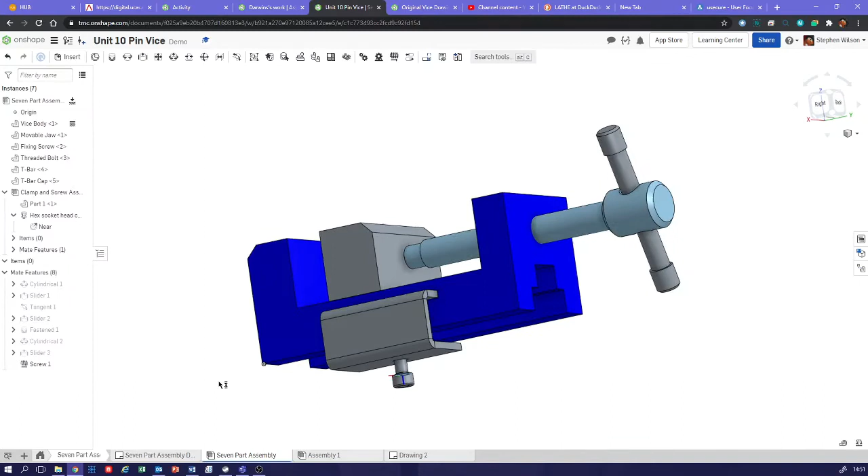So the first thing I don't think I've mentioned previously: we want a little screw to go in that hole there, and we can get that by going to Insert, Standard Content, and then selecting ISO, for international standard bolts and screws. Hex head bolt, or you could do set screws, hex socket - quite nice, quite like those. No, we don't want a set screw though. Slotted head screws, socket head screws - there we go, a nice socket head cap screw. Yeah, you can use an Allen key for that.

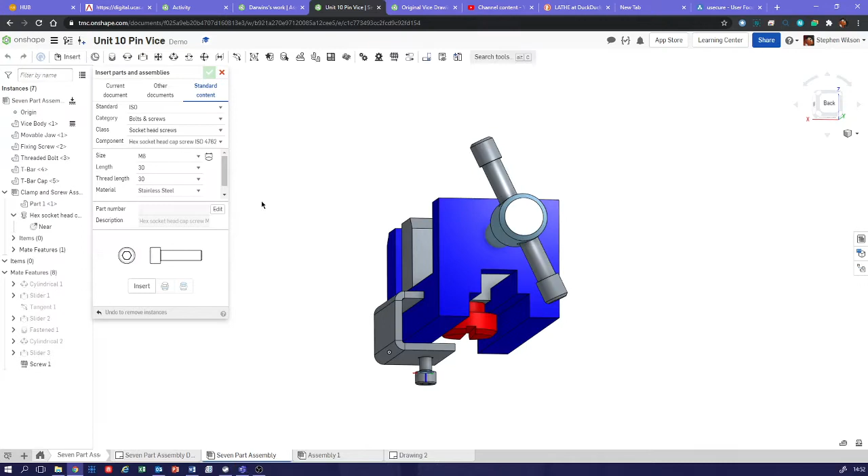And then we look at the size of the hole. We could go back to the drawing and check the size of that hole - I think it's 5mm, so we choose an M5 bolt to go in there. Just wait for it to think about that. Okay, and then we can choose the length - say 20mm is probably fine. Then we just press the insert button, and it will appear as if by magic. There we go, we can see that there, and then we can make that up into there in the usual way. Okay, so that's exciting.

Make sure you press the tick button when you've finished, unlike me who just pressed the cross button. Just to remind you, these icons here actually give you some insight as to how the things will interact with each other.

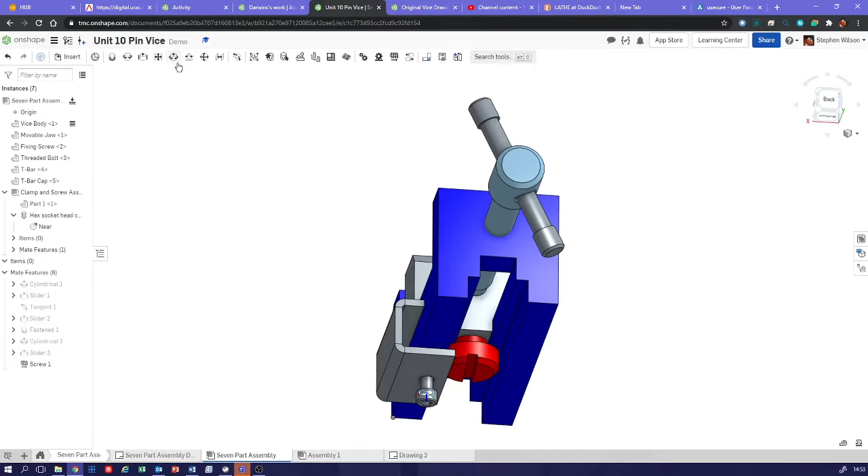So if you've got a screw thread, you want it to move backwards and forwards, but you also want it to rotate - so that's a cylindrical mate. If you don't want something to move, that's a fastened mate. So just think about how the parts interact with each other, and look at the icons and think: does that have the arrows in the direction that I need this thing to move?

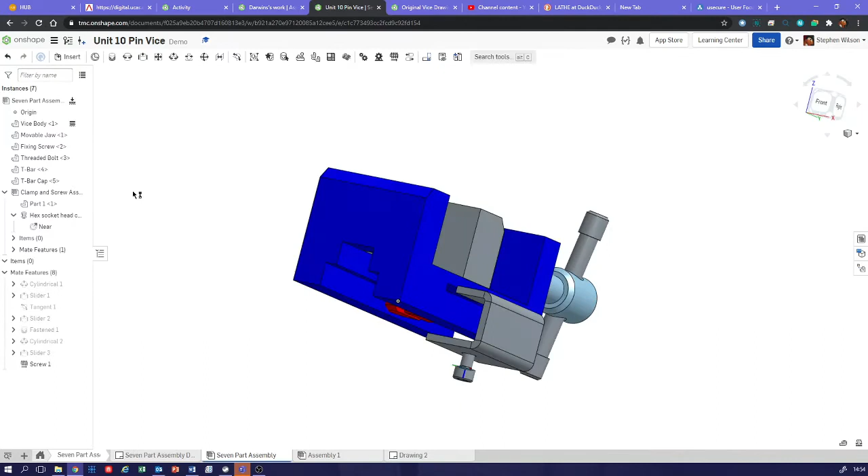When you're doing this, make sure that it slides in and out - you might have forgotten how to do that. Remember when you inserted this, I think I gave you tips on the video. Yeah, we picked an edge, didn't we? We picked an edge, so you've got what wants to be a slider mate there.

Yeah, as you can see, I'll just do it from scratch. When we move onto a surface, the blue arrow, the blue line there, is the Z-axis, and that's the direction we're going to slide in. So we don't want it sliding on a surface, do we? But if we put it on an edge, then the blue line's going in the right direction.

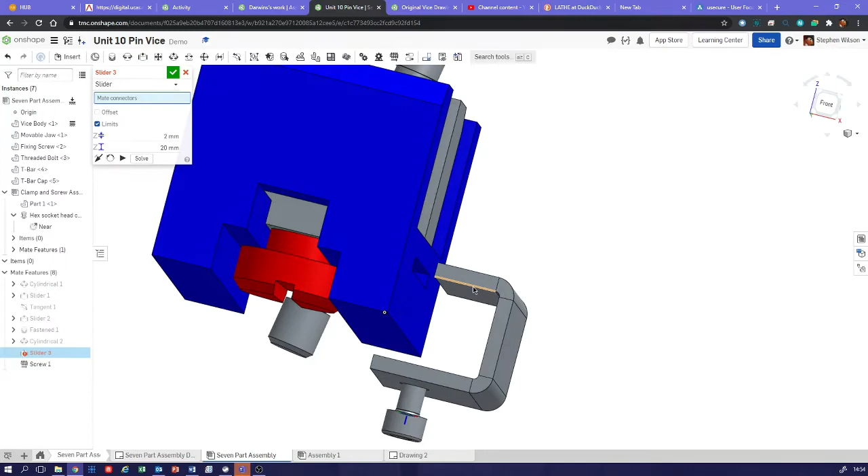Okay, so let's just pick the corresponding edges there - I'm going to pick the center points. And there we go, so we can slide that in and out now. Yeah, okay, so that's worth remembering.

The other thing, just to finish this off - you'll notice that as I move this backwards and forwards, it spins nicely. So I'll just get rid of that, and get rid of that. Of course, in reality, this part here and this part here aren't actually connected, are they? What happens is when we turn this, it moves forwards and pushes - doesn't actually sink through it, but would push this closed. But then when we move this back, it would leave it where it is.

But just to make things a little bit nicer to work within the model, we can attach these two things together, even though we know that's not the case in reality. We've got two flat surfaces - well, one flat surface and one curved surface here. So what we can do is use a tangent mate there, so we can attach it, and it just works a little bit differently to the others.

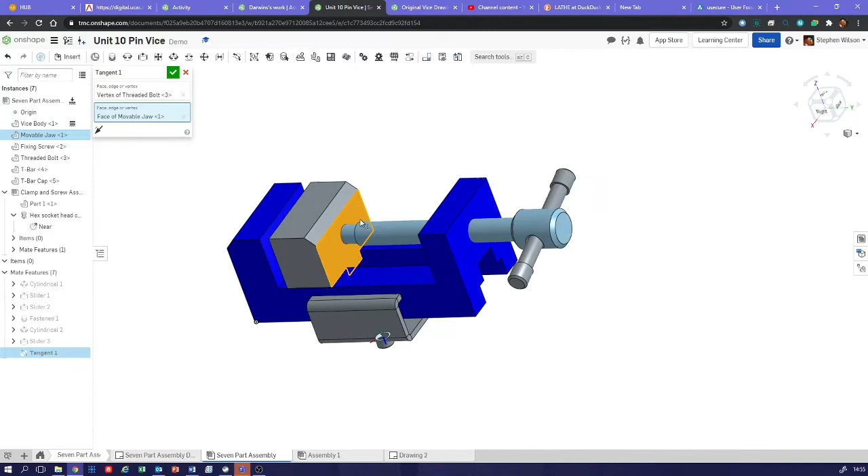Everything else, we just click our two points and it stacks them both in the same box. Here we've got two different boxes, so we just have to make sure we're in that second box when we pick our second face. Now these two things are glued together, even though in reality they're not actually glued together. It's been a bit laggy, isn't it?

Why would we do that? Well, we've got some relations we can set up: gear relations, rack and pinion relations, screw relations. So let's set up a screw relation. If we hover over it, it says: screw relation - select one cylindrical mate, select the screw relation tool, specify ratio.

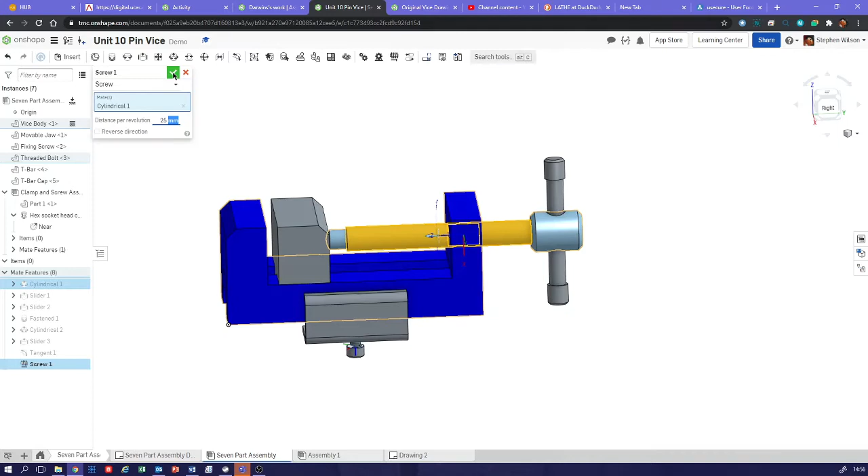What mate are we going to use? We're going to use that cylindrical mate - that's where we want our screw relation. If you want, you can set that to the pitch, the distance per revolution - work out what the pitch is per revolution, or the distance per revolution for the pitch of the thing, if you want to be particular.

But let's be fair, all we want is something that moves. Come on, you can do this. No, we can't. Oh dear, it is running very slowly. What I'd like to be able to show you is that as I slide this gently backwards and forwards, the other thing spins around, but it seems to be not wanting to do that at the moment. I'm not entirely sure why, but you saw that happening at the start, didn't you, before we did it again.

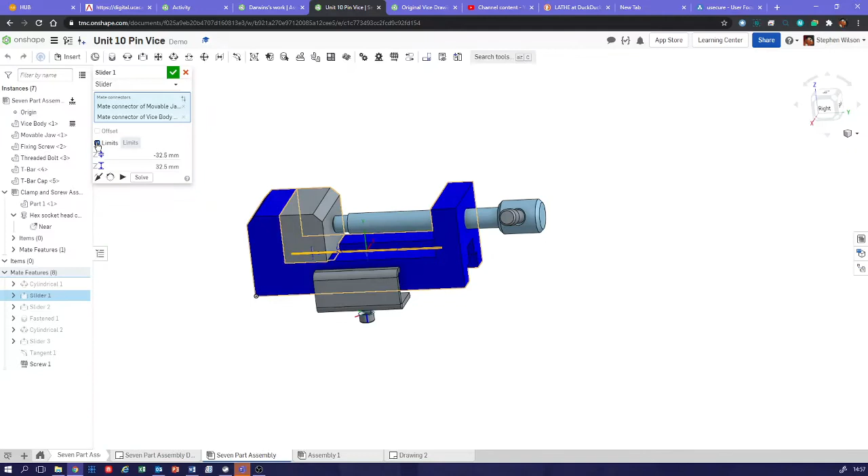So you don't have to do those things, they're just kind of nice finishing off things. Another thing you might notice about this assembly is that as I drag this part, it stops there, it doesn't go through. We do that with our slider mate, so we'll double click on that to edit it. We can do that by clicking limits, and so we can set these values to limit the movement of things, and that's worth playing with as well. It just makes things look a little bit more professional.

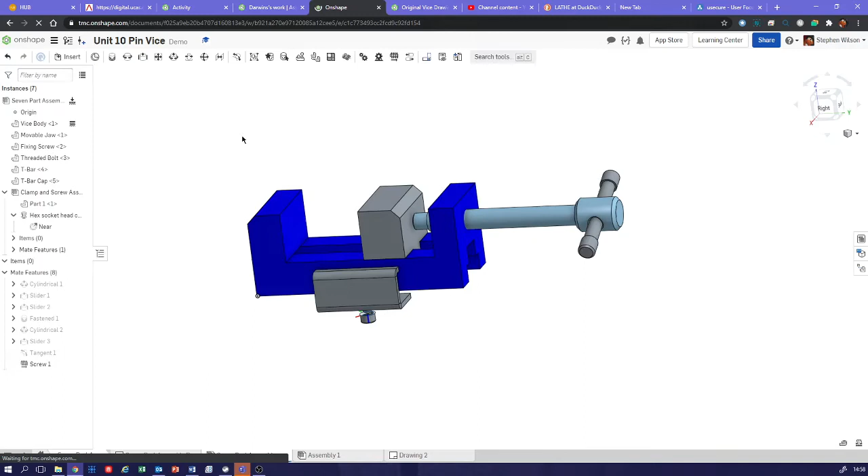I'm just going to hit refresh and see if that makes any difference whatsoever, see whether it moves a bit more smoothly. So those are some things you might like to do, just to make things a little bit more professional, a little bit more slick - that's the word I'm looking for, a little bit more slick.

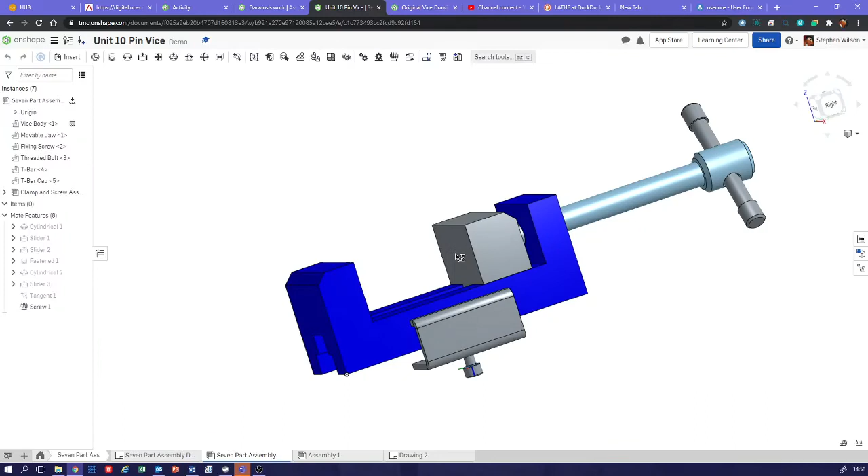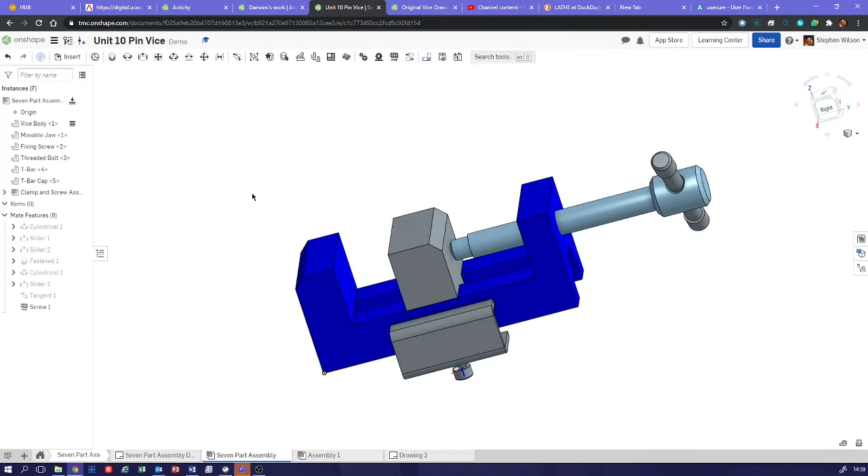Right, let's see if that's made any difference at all. There we go, yeah, we can see that now. That's better, because I've got my limits set, the parts don't go through each other. I've not set any limits on this - oh, I must have set limits on that as well. Look at that, gosh. Okay, so is there anything else we need to do here? No, I don't think so. I think those are all the major points we need for finishing off the assembly.

I've been through creation of assembly drawing in the previous video. Again, just to reiterate, if you've missed the bit at the end of the assembly video, please watch to the end, because there's a crucial bit of information there that lets the table fill itself in automatically.

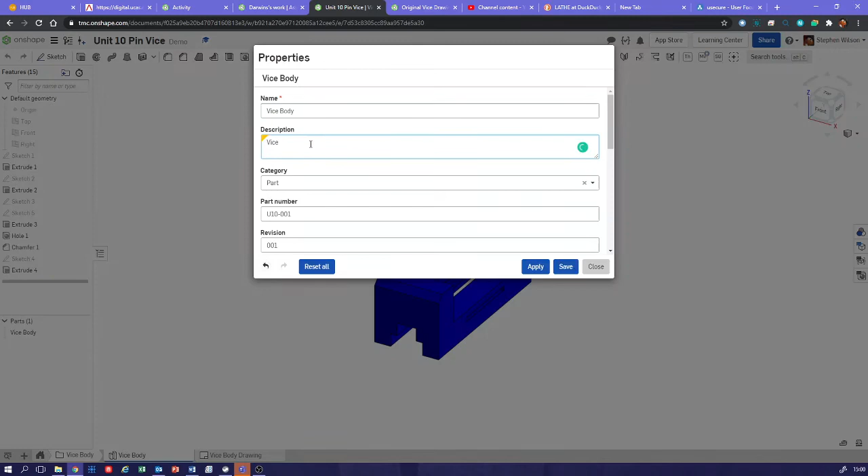All we need to do is right click on the part, properties, and then we fill in this information here, and it will fill in the table. That's from me trying to do a live demonstration earlier and constantly changing the wrong box, so let's just change that back again.